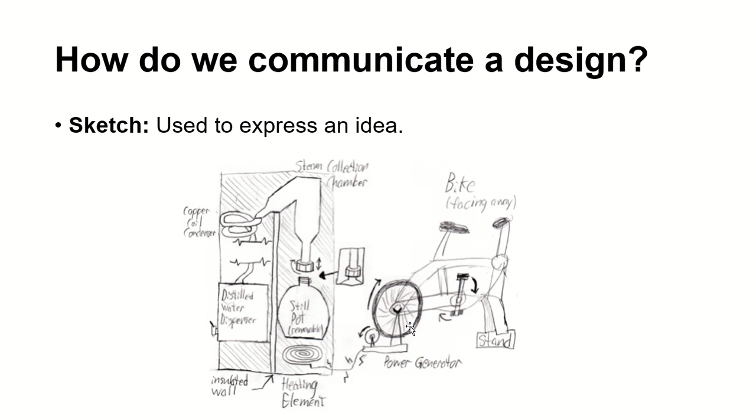Then we're going to get into detailed drawings, because this kind of sketching is not enough to manufacture, because people don't understand. You have questions like, what is the size of this wheel, what is the size, dimension and shape of this, I don't get it. So we need to do a detailed drawing - that's your technical drawing, we call it engineering drawing in other words. So here you have everything that you need to build that product. We call it a complete, or completed, design, and we need it to manufacture.

So here in this technical drawing, you can see we have dimension, scale, standard, all kinds of stuff that you need.

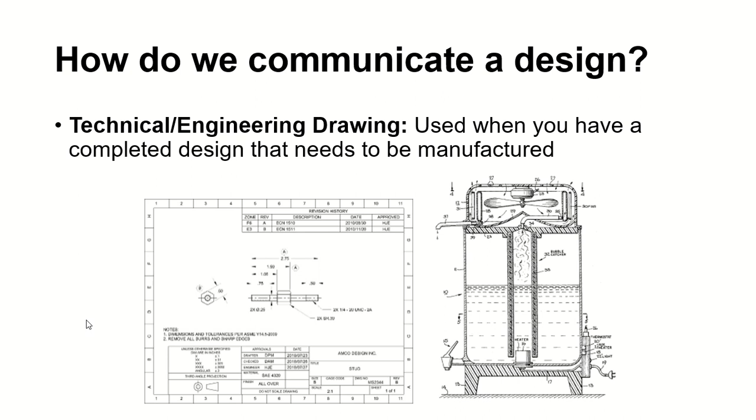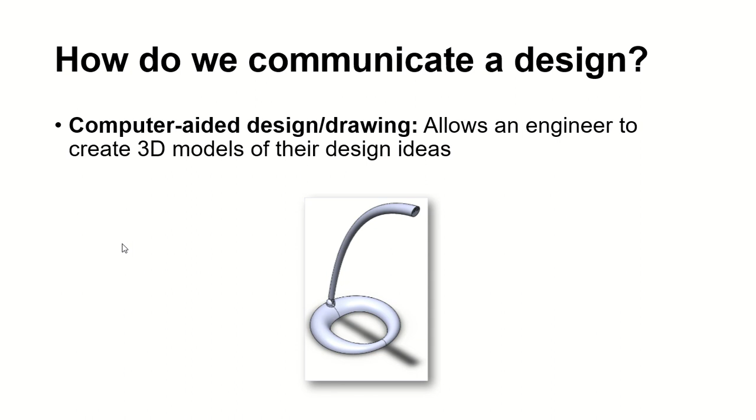Then we also use, nowadays, of course, computer-aided design to create the 3D models of your product or part, so you can be able to visualize it from 360 degrees all around. So computer aided design, we call them CAD in short, and it's another thing that we use to communicate a design.

So when we draw, we don't draw whatever we want, we follow rules. The rules are in the standards that we adopt.

So we have two major groups. One is the American Society of Mechanical Engineers, and the other is the International Organization for Standardization. You can follow one of these when you draw. It's going to give you sets of rules controlling how your drawing has to be, and it controls the placement of components on your drawing. Just follow one of these standards.

So what else do we use the standards for? We use them in our drawing, to design, to read other people's drawings, to read prints, to manufacture the parts, and also for quality control, which is to inspect for mistakes.

International communication is very important, and we use the standards because all the people in the world speak different languages, country to country. So in order for us to efficiently communicate between merchants and traders, we use the standards, so that the manufacturer in another country is able to produce the product that you designed in this country.

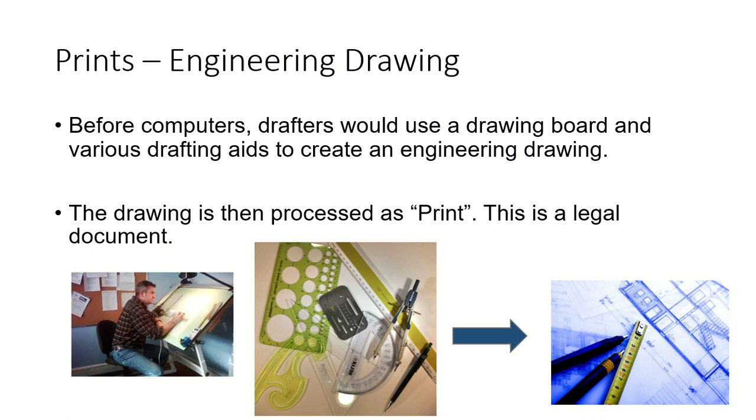Your prints, we use them to get the shape description of your product. What you want to make is in your design - your dimensions, your tolerance, your annotations, your part lists - all of your model is in your drawing.

Again, it's a legal print, meaning once you send it, you can't change it, because they're going to produce it. That process costs a lot of money, because you have to invest in it to manufacture your model. So your print, we expect it to be perfect without a mistake. That's why we bring in QA to check it - you have to check it again and again until everything is clear. Even then, sometimes you make a mistake.

If your part is big, like an airplane or ship or something, oh my gosh, everybody in that group is going to get fired. So it's not a joke - you can't draw whatever you want, you have to draw carefully, and every dimension you draw has got to be right and correct.

It will pass through so many different steps - we call it making sure, checking the quality of your drawing so that it is fit for manufacturing. All the information that we need is in your drawing for manufacturing and quality control. You've got to pass this groove to get through, otherwise it's going to bounce back.

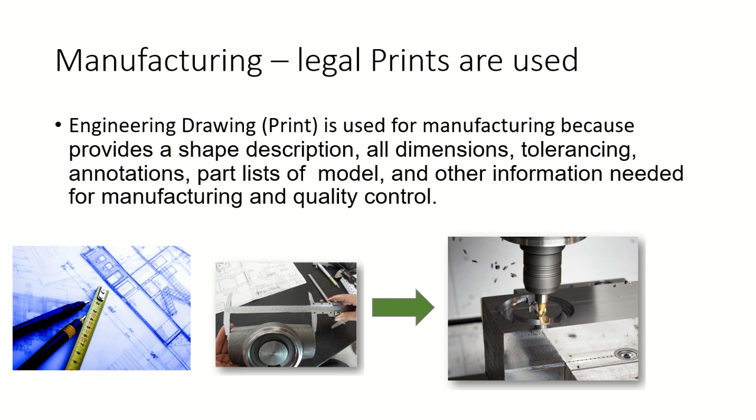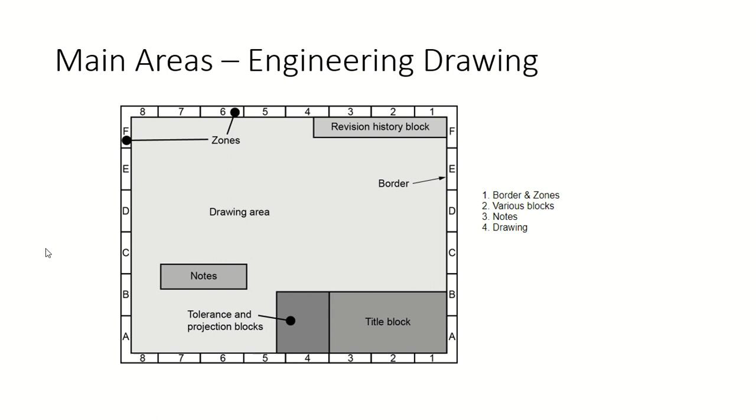Then we will get into standard. So the placement of the components and sheet sizes are controlled by the standard you follow. That's your company, depends on which company you're working for. If you work by yourself, like your own business, then you choose what fits to your product that you want to produce.

So ASME Y14.1, ASME Y14.1M standards is followed in this example. So this is a sheet that follows this standard.

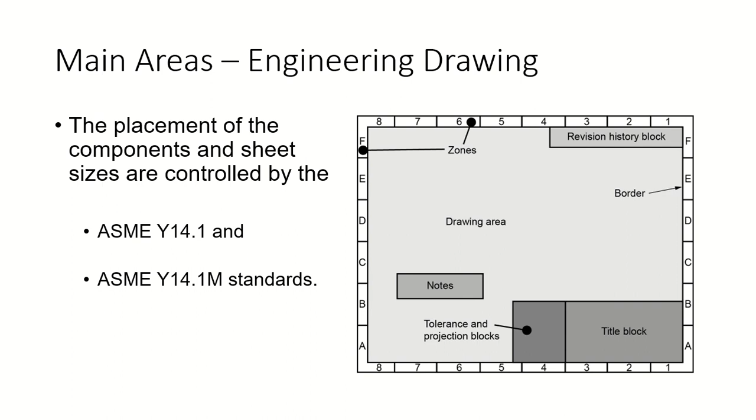All right, the size of your sheet. So I give you two different units. One is in metric, millimeters, centimeters, meter, and then you have your British, inch, pound, unit system right in there, and of course different sizes here.

So you have 8.5 by 11. Your zone, number of zones. These are your zones right there. The number of it is going to be according to your sheet size.

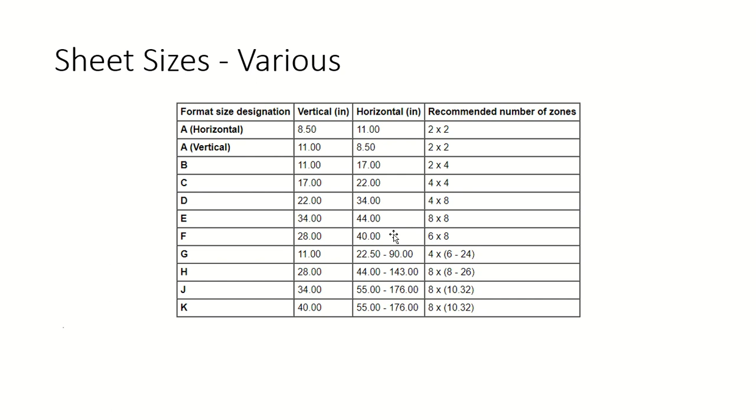So 2 by 2, we have 4 by 8, 8 by 8, 4 by 4, and then 6 minus 24 recommended number of zones for this sheet size for your drawing. So that's your drawing paper size.

All right, in metric, of course, from A0 go all the way to A3. Drawing itself is going to give you the part shape, so you know the shape, what shape you're manufacturing, and also the size.

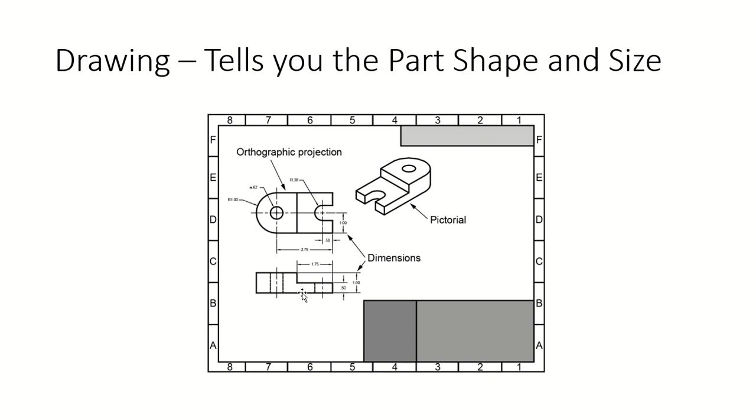See the dimensions here, so detailed dimensions are given on how to manufacture this part. 3D pictorial and 2D ortho projection is given to you, so you can be able to see the shape and size of it in your drawing.

So the drawing scale is written in the title block, and you know the title block is right down there. I'm just gonna go back here. Here, title block. So in the drawing, this is your drawing for this part, in this example. Here's your title block.

So what's written is the scale. When you pay attention, you can see this little sub block in your parent title block is your scale, 2:1 is in there. Of course we have different scales right here. Half, 1 by 2 is 1:2, and 1 by 4 is 1:4, and then double scale is your 2:1.

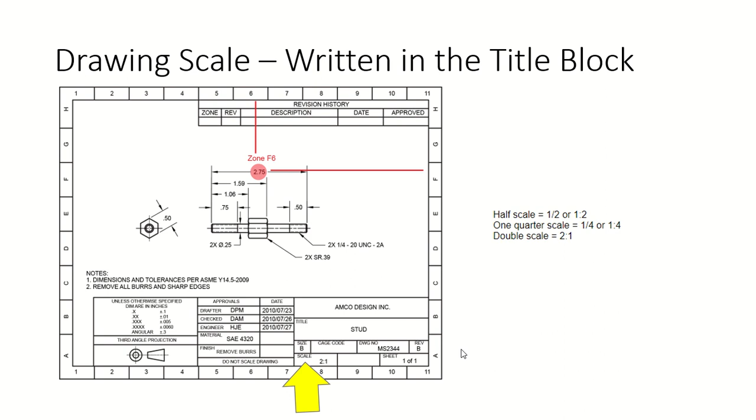So when you think about the scale, what is it telling me about? Every time you have a ratio, that's your mathematics, so you are dealing with a relationship between two things. The first thing is your drawing, and the second thing is your real world object size.

So if you go like 1 unit in your measurement on your drawing, you actually have like 2 units in your actual object in this ratio 1:2. So you draw 1 unit on your drawing, it means 2 units in your actual object. You draw 1 unit for 4 units of your object. So if your object is, let's say, 4 inches long, you're gonna draw like 1 inch of it in your drawing.

To capture that, again, our proportion matters. It's got to be proportionally related to each other. What is each other between your drawing and your actual object? The first number is your drawing, the second number represents your actual object.

It's a scale 2 to 1. See, the drawing is bigger than the actual object, because every 2 units of your drawing is going to give you 1 unit of your object. So pay attention to all of your scales.

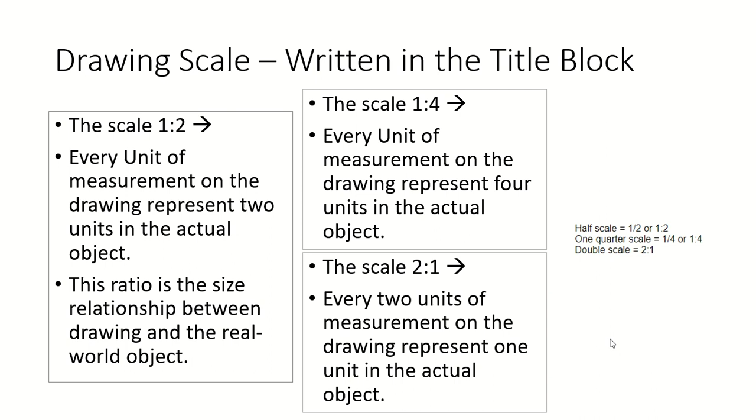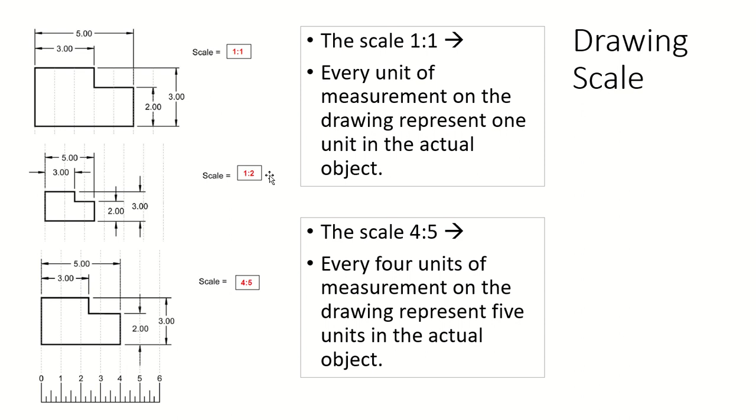Then we'll get into 1:1, so that means every 1 unit of your drawing is 1 unit of your object. 4:5, 4 units of your drawing is 5 units of your object. Okay, so now you got it how to read the relationship between the two things, your drawing and the actual object in the real world.

Alright, zones. So here are your zones. So how to read the zones: you're gonna start with your letters. You have numbers horizontally and letters vertically.

If you want to think about this zone, that's an E6. If you want to think about the zone right here, that's a D2. So if I say go ahead and look at B4, that's B and then 4, the intersection between the two. Just go with the rows and the columns.

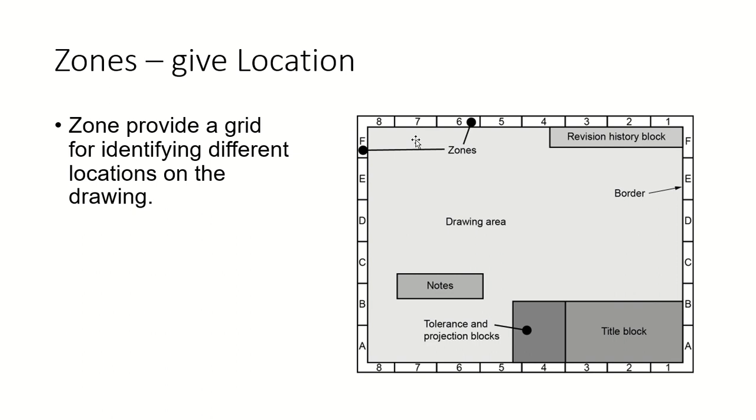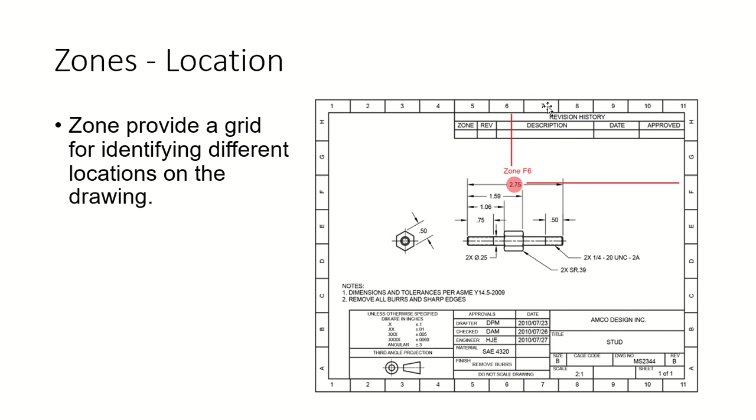So the zone is just giving you the grid, so we can identify the location on your drawing paper. For example, we're pointing to 2.75, and that location on your drawing paper we call zone F6. For example, if you think about 0.50, this little dimension here, that dimension is in zone E7. So now you get it.

Notes is another component here in your drawings, and it's right here. In this block we put the information that we want to communicate with the manufacturer. Everything you want the manufacturer to know, you put in there, especially things they need to pay attention to when they build the product you drew here.

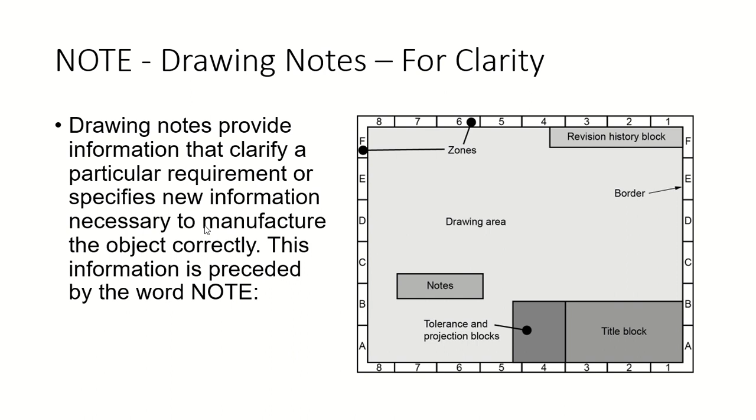So this information, we always start by writing NOTE. Number 1, blah, number 2, blah, number 3, blah, blah, blah. So we put the information you need to give your manufacturer in that box. That box is here, and we usually write it as NOTES.

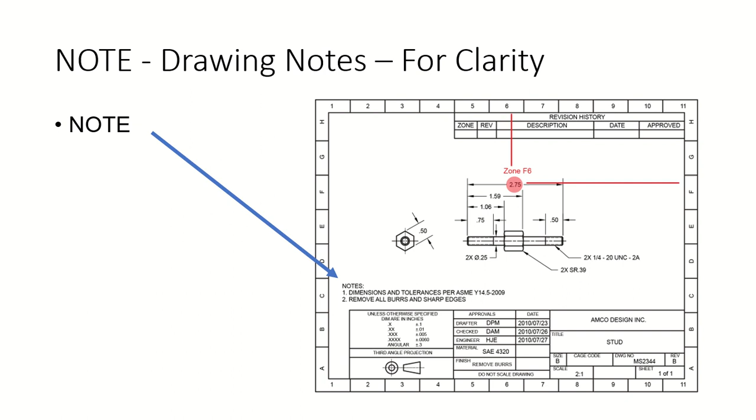Here, dimensions and tolerances - we are following ASME Y14.5 dash 2009. Next, remove all burrs and sharp edges for this product, so the manufacturer knows they've got to do this and this. This is your drawing notes, and we use it to clarify your information in the drawing to the manufacturer who is going to build or make that product.

Alright, title block is right here, at the bottom right corner. It's going to give you, again, information - everything is about information. Anyway, we're communicating information about your design of a product or a part. And again, we put all the information that your manufacturer needs in here.

Who drew this, or the size - we will get into details later. Right now you just need to know the title block location on your drawing sheet is right there.

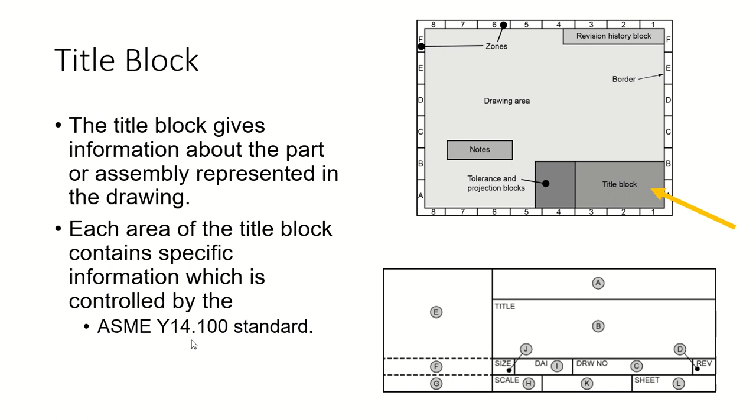So what are we going to put in there? We're going to put information for the manufacturer about the part you are drawing, and then the assembly. Again, we're not just putting whatever information - for this example we're following this standard, ASME Y14.100, for the title block information.

Here's an example, this is a problem in your textbook, the same thing. A is right here, and that is the block. Make sure you pay attention to the little line right there - it stops at the top, so it means the entire block. So that's your title block.

Your B is right here, so the block next to the title block is your tolerancing dimension block - I can go back and show it to you, which is this little guy right there. And then I'm going to come back to C - C is right here. So that's a block.

So in that block we're going to put your drafter, your checker, your engineer - that information is going to go right in there. And then your D is right here, where you put your company name and address.

Your E is your drawing title. Your F is your projection block, which is this guy - your angle, your third angle. We have first angle, second angle, and third angle projection block right in there.

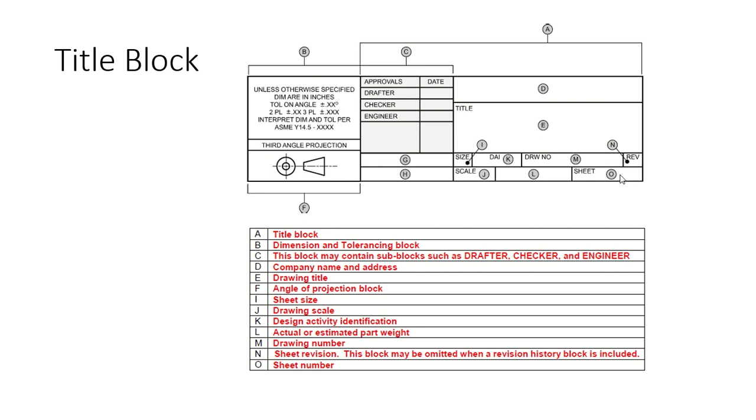And then your O is going to be right here, and that's your sheet number. So bigger parts, you might have to use different sheets, many different numbers of sheets. It depends on the part you're drawing.

All right, then we will get into the revision history block, right here, okay? And this is a bigger picture of it. So here, you're going to see all the changes made in your drawing. And we're going to use our zone to locate it, okay, in this zone I made that change, in that zone this person made that change, okay?

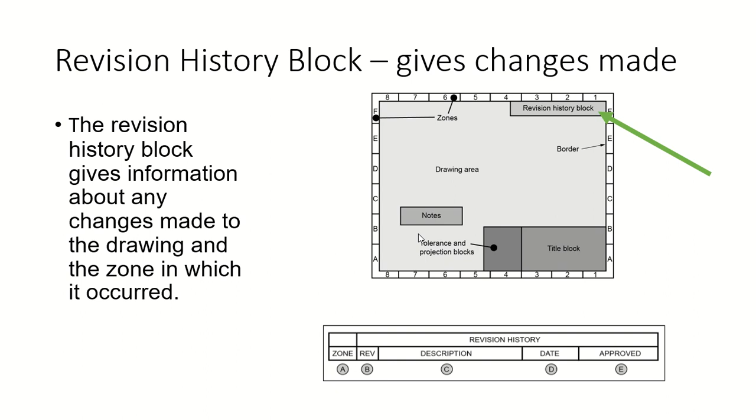So revision history block is how many times you revise your drawing, okay? And what did you revise? We're gonna put it right in there. And where is it on your drawing? We're gonna put that information right in there.

Okay, so here, this is your revision history, your zone, okay? Here, little a, location, of course. Your B, okay, is REV, and that's nothing but revision letter or number, how many times you revise. Then your C is your description, of the change, what changes did you do.

And then here, D is your revision date, on which day did you do it. And then E, has it been approved, okay, put it in there, everything. You can't just go in and change it, whatever you want to do. You can't do that. Every step you do, you got to tell what you did to other people, yeah? So everybody is on the same page.

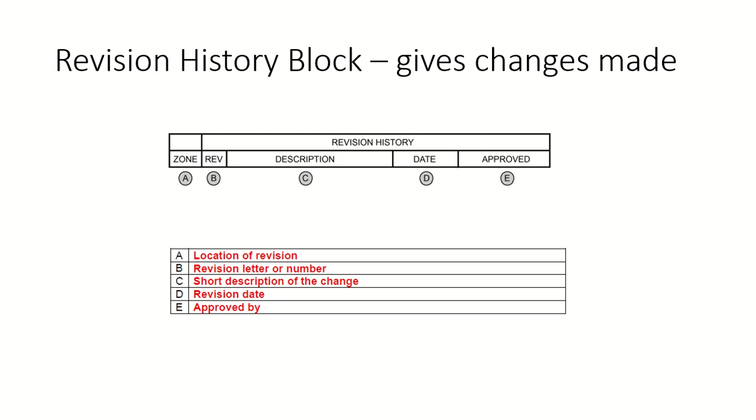All right, tolerance block is this little guy right there. So what are we going to put in there? We're going to put in our standard, what standard we follow, our projection of our part, and then your dimension and tolerance is right in there of your part, okay, in your drawing.

So in the tolerance block, here in this parent block, we have a sub block. So the first sub block is your tolerance block. It's going to give you the default dimension tolerances. And then the drawing standard, of course, that you use to draw your part or the entire model, depends on the size of your part you're drawing.

The projection block is just below your tolerance block. And of course, you're going to use which projection method. Are you following the first angle, the second angle, or the third one, to create that.

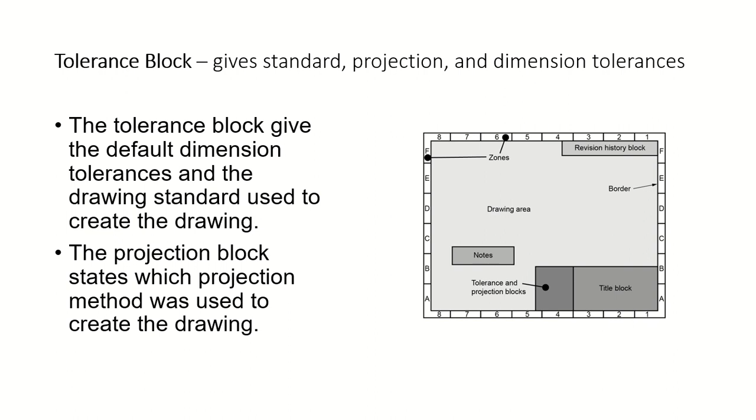Okay, let's take a look at it in a real sheet. So here, see, this is your tolerance, and here is your projection, and in this example it's a third angle projection. Okay, the standard, look at this, the units are given to you, yeah.

Since they're putting the standard in a tolerance zone, you can be able to understand what are we following? Okay, so here you can also see, look at this, all the tolerances, these are plus and minus, in details are given to you in this block, yeah.

Okay, so that's it for chapter 1. And the most important thing for you is to be able to get all main areas in your drawing sheet, and of course your scale. If you go back and study the scale, the ratio, 1:2, 2:1, for the relationship between your drawing and the actual object. I think it should be fun.